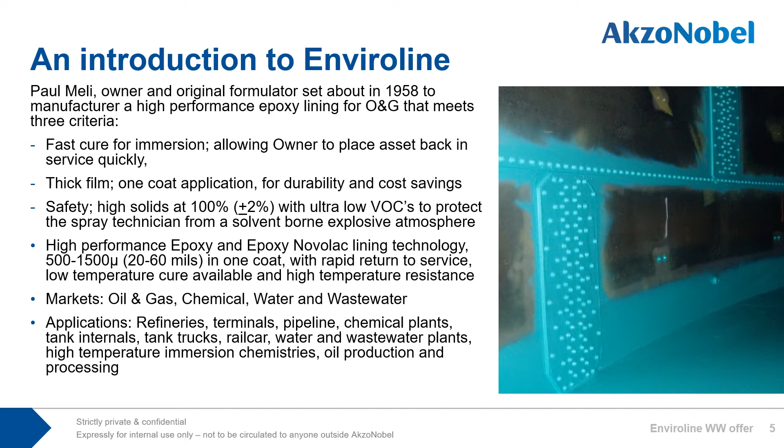Advantages of fast return to service. Taking a high elevation look and assuming the same tank size for all 3 scenarios, this construction time chart shows the typical difference of a 2-coat 5-day cure, a 1-coat 5-day cure, and representative of Enviroline products, a 1-coat 1-day cure, saving time, money, and delivering the asset back to the owner as quickly as possible.

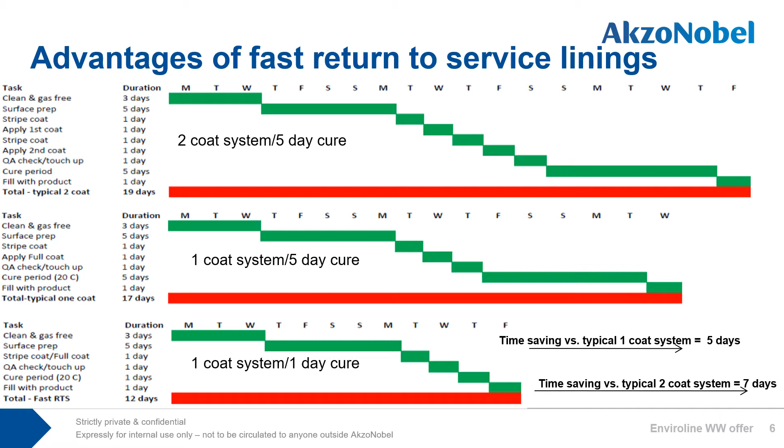We will begin with Enviroline 124, with origins going back 60 years as a quick-set epoxy to adhere to the steel cover and closing up of an existing underground oil storage tank after lining the interior and making it ready for a quick burial. It is a solvent-free 2-component polycyclamine cured Novolac epoxy and is highly viscous, can be applied at 1,000 to 3,000 microns in a single coat.

Benefits are good adhesion to a less than perfect surface prep, meaning a high-tech product, low-tech application. Single coat application by trowel or knife, and for the most experienced, airless spray is available. Fast return to service in 2 hours at 25 C. Excellent impact and abrasion resistance. Resistant to most fuel and oil commodities such as gasoline blends, biodiesel, crude, and ethanol.

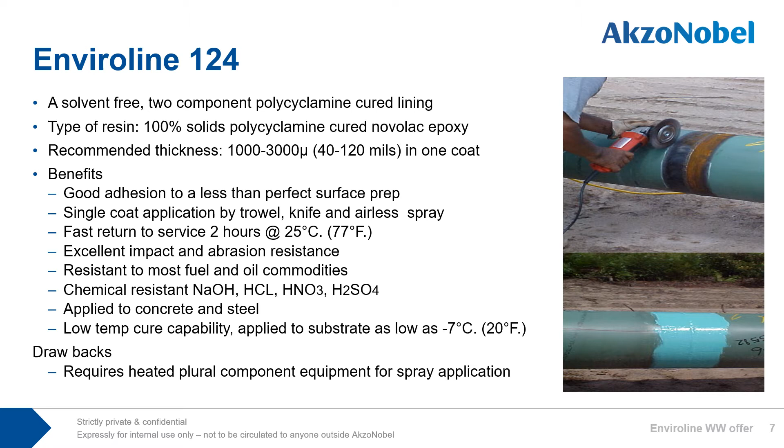Chemical resistant to sodium hydroxide, hydrochloric, nitric, and sulfuric acids. Can be applied to concrete as well as steel. With low temp cure capability, can be applied to substrate as low as -7 C. Drawbacks are if you intend for spray application, it will require heated plural component equipment.

The incomparable Enviroline 376F series. Enviroline 376F is the cornerstone lining system of the oil and gas industry. The first project with Enviroline, or at the time manufactured by IECC Industrial Environmental Coatings Corporation, was completed in 1995 with 376F60 for sour water service in the largest refinery on the West Coast, and it is still going strong.

After 25 years, with 4 products to choose from: Enviroline 376F30, 376F30LT, 376F60, and 376F60LT, this helps the owner with options depending on the season, cold atmospheric conditions, and corrosion impact to the asset. They are a solvent-free 2-component 100% solids polycyclamine cured Novolac epoxy, applied in a single coat at 500 to 2,000 microns, depending on which product you are applying.

We recommend Enviroline 376F30 applied at 500 to 1,000 microns and 376F60 applied at 750 to 2000 microns. Enviroline 376F60 can be applied as low as 20 mils. However, we'll need a warm substrate and a hot mix to help with flow and minimizing discontinuities in the film.

Applications depend on the severity of corrosion of the surface. Enviroline 376F30 manages new to moderately pitted substrate, and for heavy corrosion, Enviroline 376F60 works extremely well.

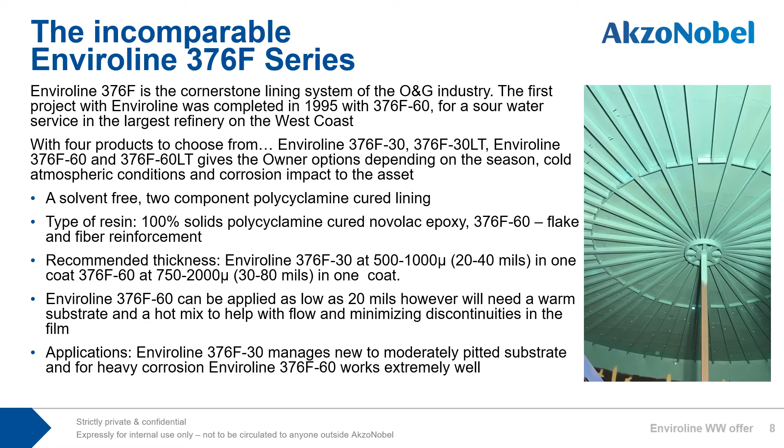Now on to the benefits of Enviroline 376F. Enviroline 376F60 and Enviroline 376F60LT are recognized per API Recommended Practices 652 as a reinforced thick film epoxy, and accepted by API Standard 653 as one of the safeguards for long-term inspection interval. See the API 652-653 e-learning module for more information.

Excellent resistance to crude oil up to 82 degrees C, fresh and saltwater immersion up to 60 degrees C. Manages immersion in sour crudes, all types of finished fuels, biodiesel, solvents, and strong caustics.

The low temp hardener for both 376F30 and 376F60 resins are one and the same. The regular hardeners are not interchangeable. Can be applied to a substrate as low as -7C.

Takes about 6 days to cure. I witnessed this on the North Slope, Alaska, in the winter several years ago, where outside temperatures were a calm -45 to -50 C.

Fast return to service in 14 hours at 25 C. I am not aware of another product with a faster cure for hydrocarbon immersion service in this industry, or one that can cure as low as -7 C.

Excellent impact and abrasion resistance. The drawbacks are poor resistance to acids; plural component equipment is recommended, however it can be applied with single leg airless equipment and an experienced crew. Enviroline 376F60LT should not be applied over 45 mils in one coat on vertical surfaces, or it may sag.

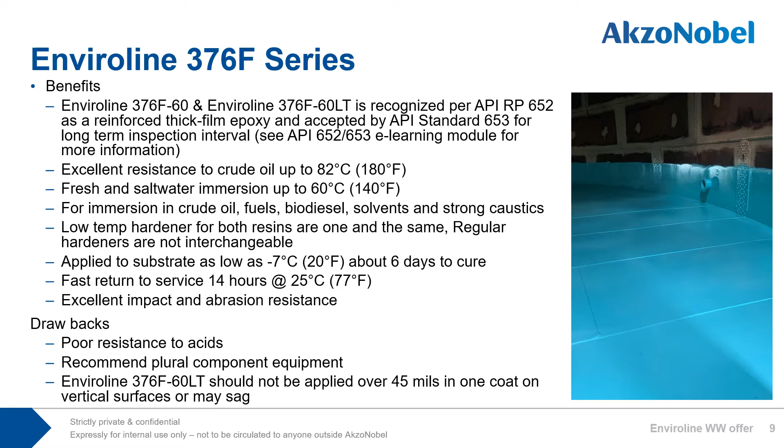Enviroline 405 HTR, one of the toughest, most versatile lining products I've had the pleasure of working with. An ultra-high solids, two-component, 100% solids polycyclamine cured Novolac epoxy with glass flake and fiber reinforcement, can be applied in one coat at 500 to 1500 microns.

Like 376F60, it's a reinforced thick film epoxy as defined per API 652 and accepted by API 653 as equal to fiberglass reinforced products. Suitable for immersion in crude oils, fuels, biofuels, solvents, strong caustics, and some alcohols like propylene and ethylene glycol.

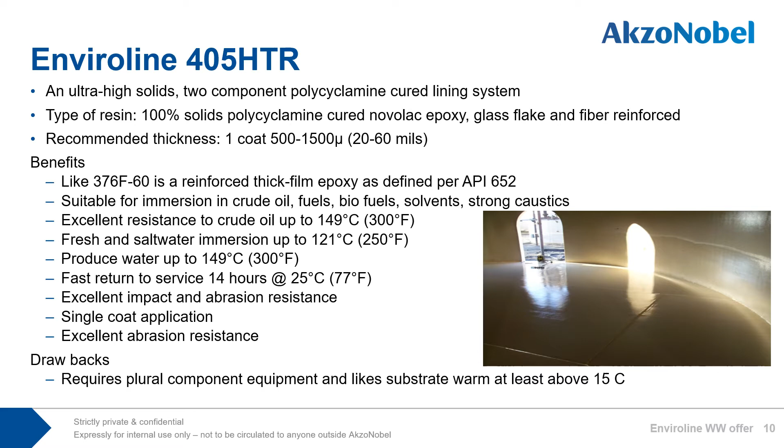Excellent resistance to crude oil up to 149 C, fresh and saltwater immersion up to 121 C, produced water up to 149 C, fast return to service in 14 hours at 25 C, excellent impact and abrasion resistance, single coat application. Drawbacks are it requires plural component equipment and likes the substrate warm, at least above 15 C.

Enviroline 2405 is almost as versatile as Enviroline 405 HTR, an ultra-high solids two-component, 100% solids polycyclamine cured epoxy with Teflon additive, applied in a single coat at 400 to 750 microns.

Excellent resistance to crude oil up to 149 C, fresh and saltwater immersion to 121 C, produced water to 121 C. Can be utilized as a CUI, managing up to 204 C. Suitable for immersion in crude oil, fuels, biofuels, and strong caustics. Fast return to service in 48 hours at 25 C.

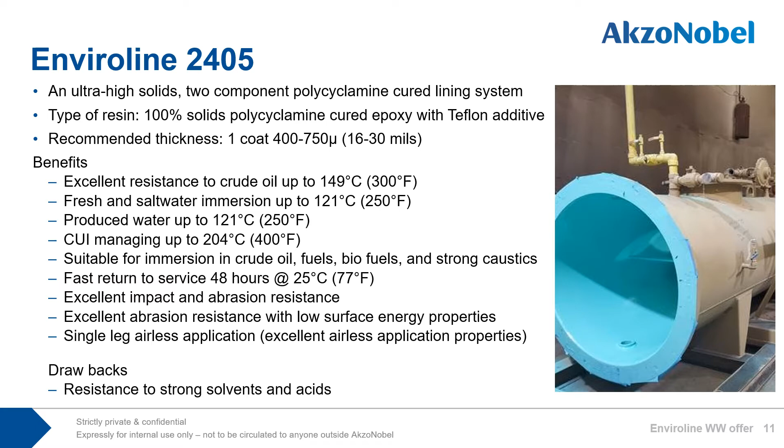Excellent impact and abrasion resistant, with low surface energy properties. Single leg airless application with excellent airless application properties. Drawbacks: resistance to strong solvents, acids, and alcohols like ethanol.

Typical end uses for the global range of Enviroline products. Applications for Enviroline 124 in maintenance and new construction.

As mentioned prior, the origins of this product go back 60 years, formulated then for sealing up a relined below-ground oil storage tank manhole cover, and now predominantly utilized for pipeline girth weld and holiday repair, with excellent adhesion to fusion bonded epoxy.

Coated pipe lab testing completed in the AkzoNobel Reutlingen lab confirmed excellent adhesion and compatibility with Resicoat epoxy powders, with a passing grade on high temperature cathodic disbondment testing.

Performing as high as 82C in buried environments, it can also be applied as a tank lining repair for Enviroline 376F and other linings, provided proper prep and chemical immersion compatibility. Please consult with technical support for immersion resistance.

Resistant to crude oil, aviation fuels, and gasoline blends including ethanol. Used in clarifiers and wastewater linings, and for performing localized repair, putting the asset back in service quickly.

Resistant to a wide range of chemicals, works well as a high-build thick film for pit filling on older tank floors, up to 3,000 microns, as well as crude storage rivet repair, stopping leaks on the external shell.

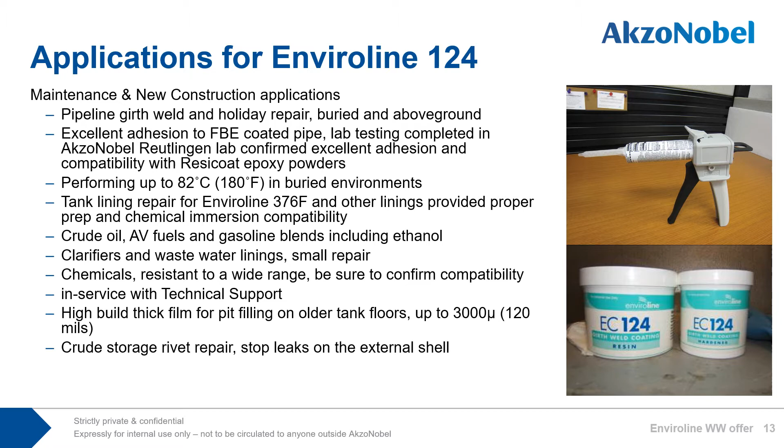At times this can be done with the product level up. May have to drop the product level below the repair location and take a couple applications to stop the weeping.

Applications for Enviroline 376F. This is one tough lining system for maintenance and new construction, with a decade of global history and decades in North America, used on pipeline interiors, exteriors, atmospheric and buried, passing robust cathodic disbondment tests at elevated temperatures.

Resistant to crude oil, aviation fuels, diesel fuel, biodiesel, gasoline blends, and ethanol. Compliant with Energy Institute Standard 1541, second edition 2016, which provides performance requirements for protective coating systems that may be used.

In aviation fuel handling systems, the standard recognized worldwide is an important third-party testing protocol for linings and coatings performance in aviation fuels immersion service. This shows the customer that Enviroline 376F60 passed the performance standard for corrosion and chemical resistant safe storage of aviation fuels. EI 1541 should be on every aviation fuel storage owner's specification.

Resistant to caustics, managing greater than 20% sodium hydroxide at 71C, less than 20% at 40C. Clarifiers and wastewater treatment plants, spools, chemical processing, secondary containment.

And I cannot emphasize enough how important Enviroline 376F60 has been recognized by API 652-653 as a reinforced thick film epoxy, equal in performance to an FRP system, applied in less time at less cost to the owner.

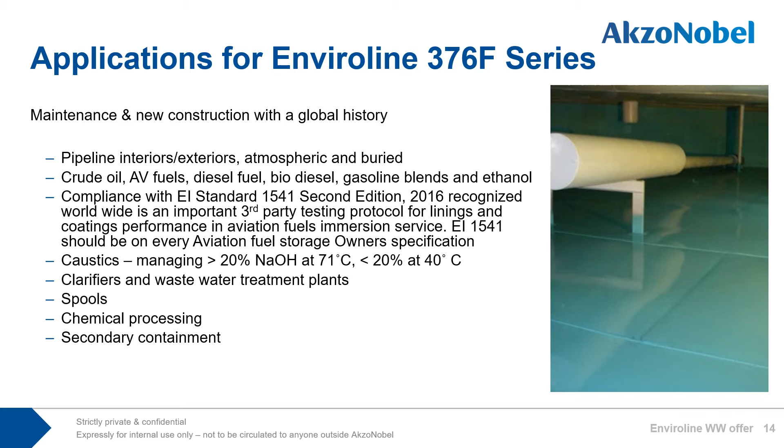Applications for Enviroline 405 HTR. For maintenance and new construction, with thousands of lined, fixed and mobile assets and miles of buried pipeline, interiors and exteriors, managing elevated temperatures and excellent resistance to cathodic disbondment.

As a versatile lining, resistant to crudes, diesel, biodiesel, gasoline blends, and ethanol, you will not find a better lining system for the demanding immersion environments found in upstream oil and gas production. Produce water, downhole tubular, heater treaters, separators, polishers, clarifiers.

A strong lining for various caustic services. Spools, resistant to elevated temperature chemical immersion services. Meets requirements of the latest API 652-653 publications as a reinforced thick film lining, formulated with a fiber reinforced system, allowing the maximum internal inspection intervals. Also great for secondary containment due to a wide range of elevated temperature and chemical resistance.

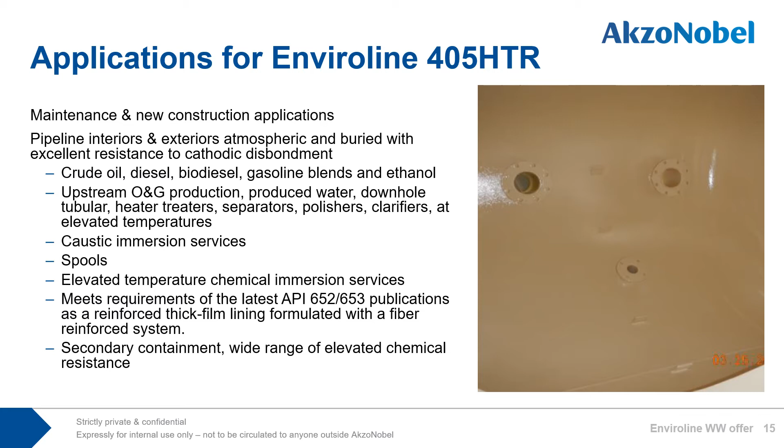Applications for Enviroline 2405. Great for maintenance and new construction applications with more than 1,000 vessels lined in a short time since final product release in 2015. Finding a home with OEM and rail cars due to versatility, ease of application, and fast throughput. And for rail cars, 2405 is FDA compliant for both wet and dry foods.

Miles of pipeline, both interior, exteriors, atmospheric, and buried. Resistant to crude oil, diesel fuel, and finished fuels. Excellent at elevated temperature chemical immersion service. Also great in oil field production. Produce water, downhole tubular, heater treaters, separators, polishers, clarifiers, and at elevated temperatures.

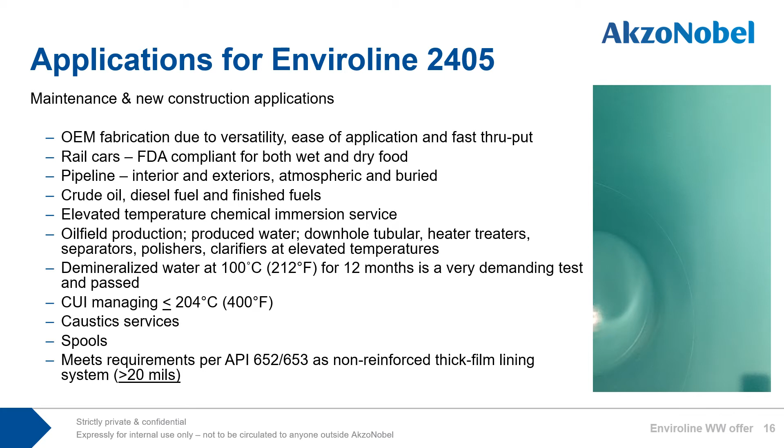Demineralized water. Very tough test at 100C for 12 months and passed. Manages under insulation at 204 degrees C. Resistant to caustics. Spools. Meets requirements of API 652-653 as a non-reinforced thick film lining system.

Here's just a few selected case histories of the owners and applications with the products listed in this module. Rather than call out the list, I'll leave you with 30 seconds to review.

Well, it's only 15 seconds. I think silence is long enough. But for more history, you can look up track records on the M&PC product data site.

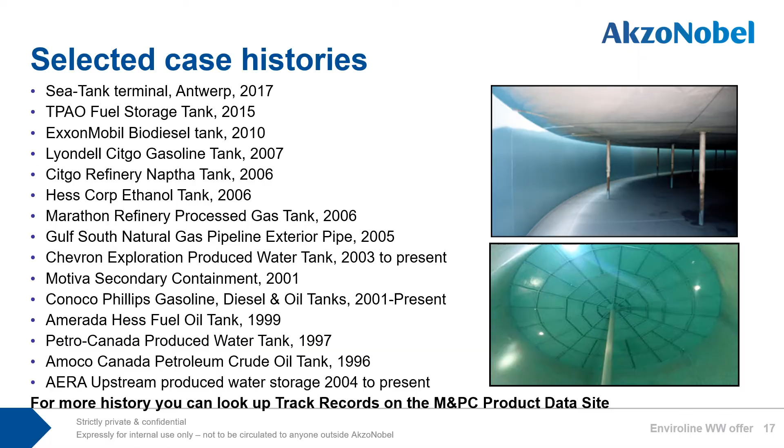And now moving on to surface preparation. Proper surface preparation is the backbone to maximizing the service life of a high-performance immersion lining system.

Recommended site requirements. Cleanliness requires organization in keeping the job site clean and safe. Contamination, as we discussed earlier, will cause a shorter life cycle and/or premature failure in the lining system. Moisture ingress causes degradation of prepared steel and will need to be reabraded to specification if compromised.

It is important that the job site is set up correctly, that you have adequate supply of electricity, and that your equipment is in good working condition. Important power sources include compressors for blasting and spraying, required to deliver enough oil and moisture-free clean air as necessary.

Ventilation is important to maintain a safe working atmosphere. Lighting to ensure good visibility in all phases of a lining project. Dehumidification to maintain environmental conditions, and it's important that the equipment is sized to the space, recommending holding the humidity below 45%.

Heating to maintain steel temperatures in accordance with the data sheets and application guideline during application and curing of the lining. Storage facility is helpful to maintain the temperature, protecting the products from cold and thermal cycling, possibly for preheat of materials prior to use.

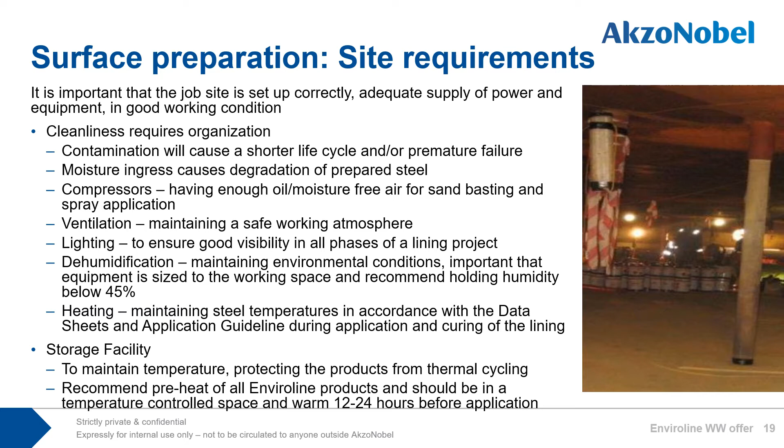All Enviroline products should be in a temperature-controlled space and warmed up 24 hours before application. The importance of surface preparation.

Successful in-service performance of Enviroline, as with any other coating systems, is ultimately dependent upon correct surface preparation. Important factors to consider are removing surface contaminants is the first step, and most important, because if contaminants are left on the substrate during the next step of abrading the surface, it will most likely drive the contaminants into the steel, setting the lining up for a premature failure.

Abrading the steel in accordance with the data sheet application guidelines and specification, if available, promotes adhesion of the lining. Completing these two steps correctly maximizes the service life of the lining system, minimizing the maintenance costs. And to wrap it up, poor surface preparation will cause a shorter life cycle and/or premature failure.

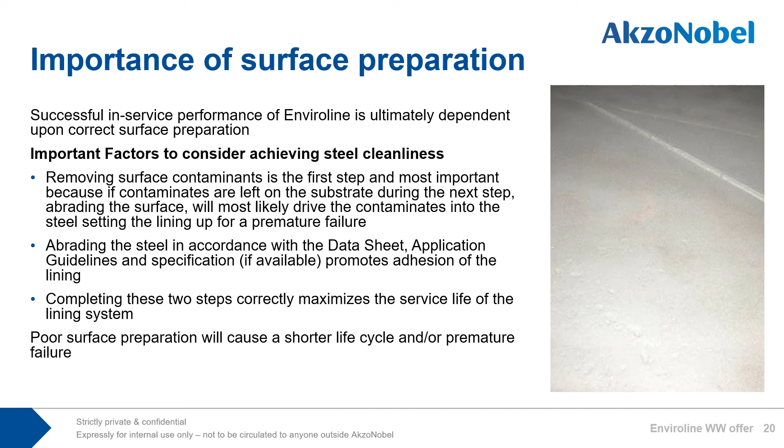Surface preparation considerations. Steel should have all weld spatter removed, and weld seams and edges should be rounded or smoothed. Otherwise, you need to be most diligent when stripe coating porous welds and anomalies left on the substrate. All surfaces must be clean, dry, and free from contamination such as dirt, dust, soluble salts, oil, and grease.

Check your product application guidelines for maximum permissible soluble salts, which is very important for elevated temperature aqueous solutions. Coatings and linings are permeable, and eventually water will get to the substrate, and if there's contaminant left, it will create a corrosion cell and blister the lining.

Allowable soluble salt levels may differ depending upon cargo and temperature. Acceptable soluble salt levels drop as temperature goes up, meaning the higher the service temperature, the cleaner the steel is required. Generally, the method of preparation is by dry abrasive blast, achieving an SA 2.5, an NACE number 2, or an SP10. These three standards achieve similar steel cleanliness.

Certain aggressive immersion conditions, such as elevated temperature aqueous solutions, may require a higher level of cleanliness, an SA3, an NACE 1, or an SP5, again achieving similar steel cleanliness. A sharp angular profile of 75 to 125 microns is required for thick film linings.

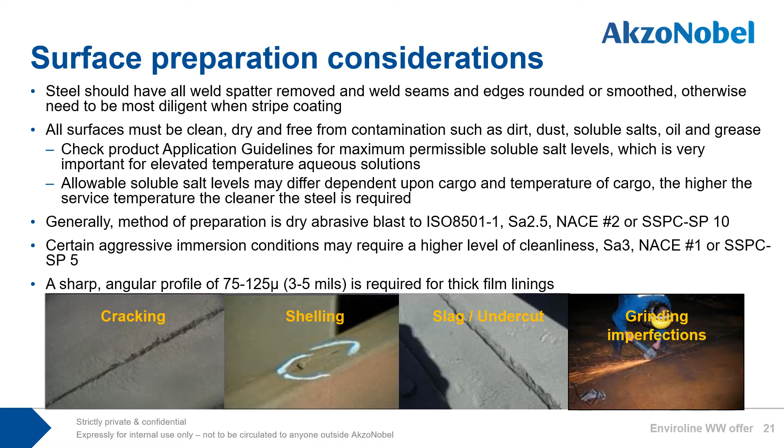My favorite topic, the application of Enviroline products.

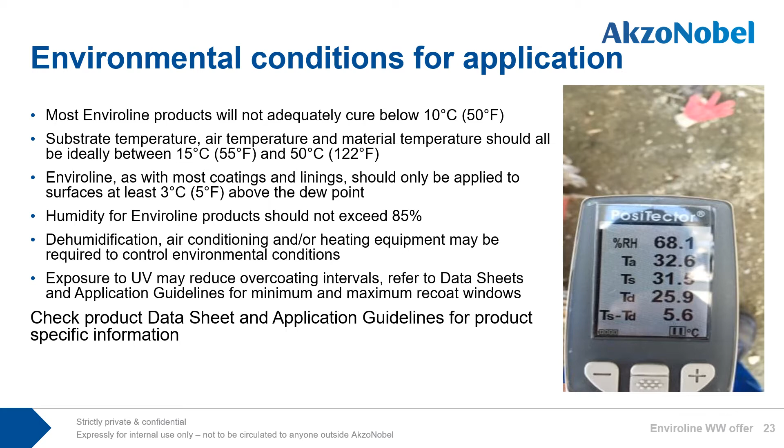Exposure to UV may reduce overcoating intervals, so be aware of the minimum and maximum recoat windows as recommended in the data sheets and application guidelines. Always check the product data sheet and application guidelines for specific information.

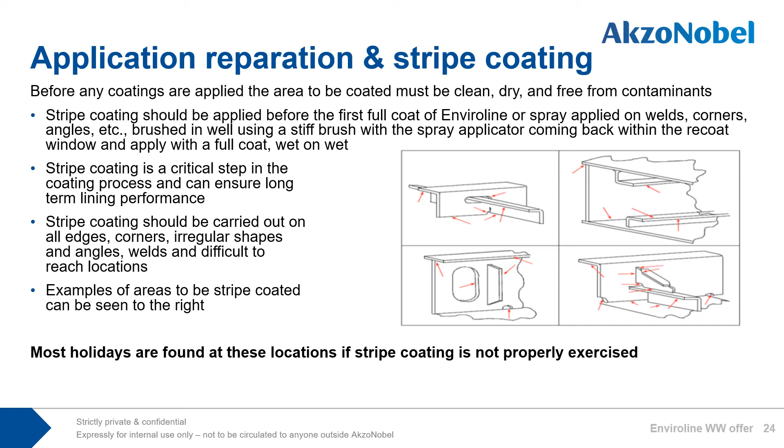Here's an example of proper stripe coating. For more viscous materials like Enviroline, you may require a stiffer brush, or like the brush in this picture, taking a pair of scissors and cutting back the bristles about halfway.

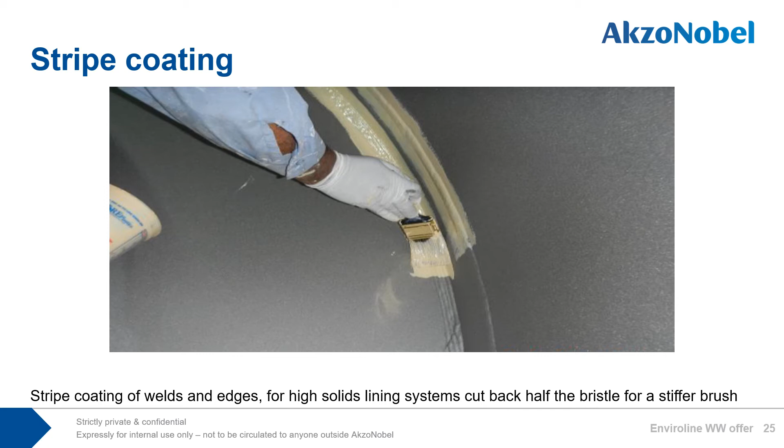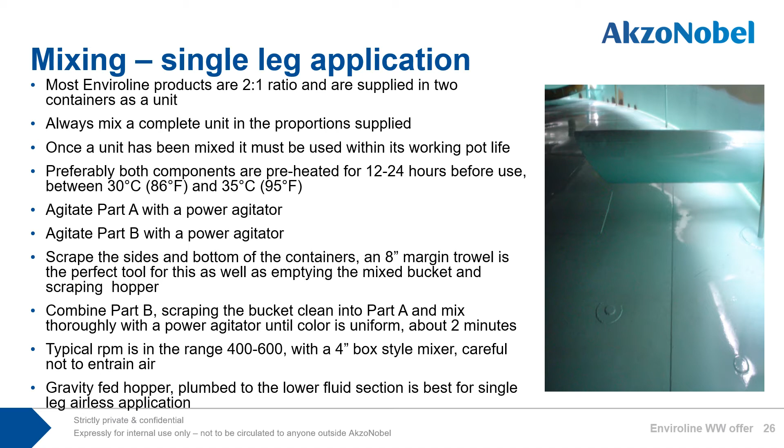Combine part B, scraping the bucket clean into part A, and mix thoroughly with a power agitator until color is uniform. It takes about 2 minutes. Typical RPM is in the range of 400 to 600 with a 4-inch box-style mixer, trying not to entrain air. A gravity-fed hopper, plumbed to the lower fluid section, is best for single-leg airless application.

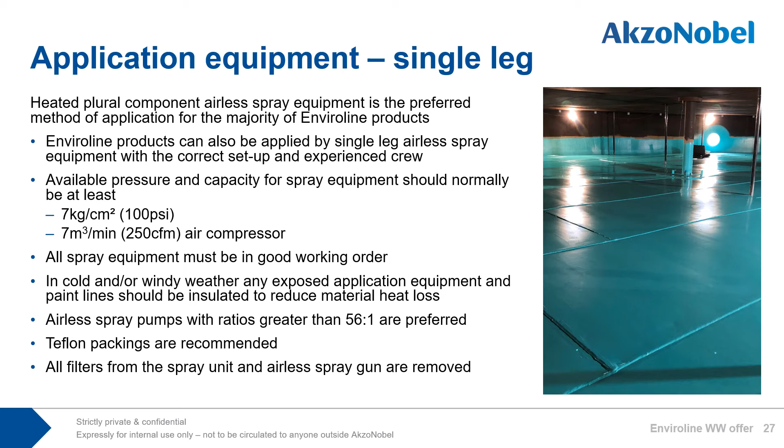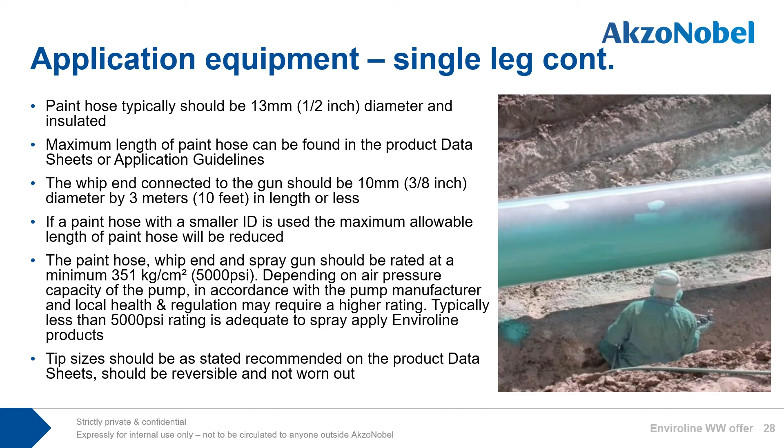And there's more on single leg airless application. We recommend that both components are preheated between 30 and 35 C for 24 hours. Trace heated hose or insulated hose with an inline heater is recommended to maintain the correct and uniform application temperature. I recommend keeping the length of the paint hose as short as possible and no more than 30 meters.

Always refer to the product data sheet and application guidelines for correct material temperatures during application. If material overheats during any part of the application process, it is recommended that the application is halted and the pump cleaned out immediately to avoid risk of material setting up in the hopper, pump, lines, and gun. Usually this is spotted by either the applicator losing the fan at the gun or the hopper tender seeing the product beginning to set up in the hopper.

Maximum application temperatures differ by product, but temperatures above 50 C should be generally avoided with a single leg application.

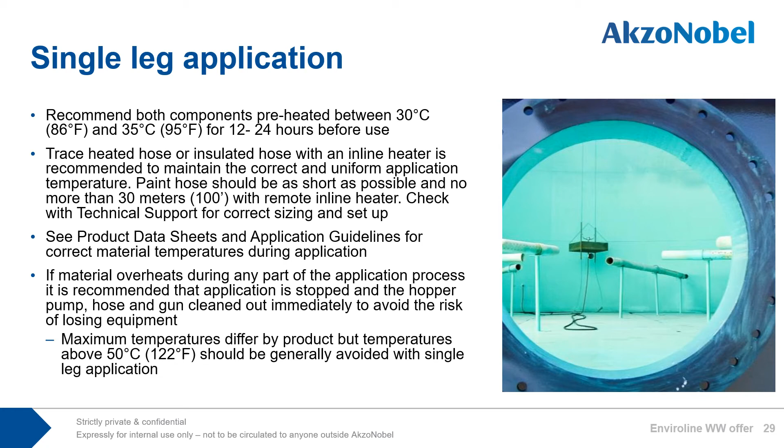Enviroline single leg airless setup. Enviroline 2405, 405 HTR, and 376F can be applied with a single leg airless with the equipment shown on this slide. For single leg airless setup, it starts with a minimum of a 56-to-1 pump. We did use 45-to-1s decades ago, spraying the predecessor of these products, so it can be done, just hard on the equipment. Minimum of a 90 cubic centimeter fluid section, which is important.

Larger fluid section delivers volume, which along with heat is key to successful application. Moving on to the inline heater. The mixed paint coming out should be at 35 to 46 C, and around 35 C at the spray gun for the best spray pattern.

When you first start up, you should recirculate until the paint lines and gun heat up. Or I recommend keeping the hose and gun warm prior to application and begin to spray into a bucket until spray pattern is achieved. You'll lose a little mix this way, however less risk than possibly recirculating too long with a short pot life.

The paint hose should be a maximum 15 meters of 13 millimeter diameter insulated hose, 30 meters if the hose is heated, and a 10 millimeter diameter 2 to 3 meter whip hose.

For the spray gun, I recommend one that has the paint delivered direct to the barrel behind the spray tip with a live swivel connection to the whip line, achieving better throughput this way. WIWA 500F and the new Graco silver guns have no springs to deal with. Graco XTR5 and XTR7 deliver through the handle, again no springs. They do have plastic grips for the hot handles.

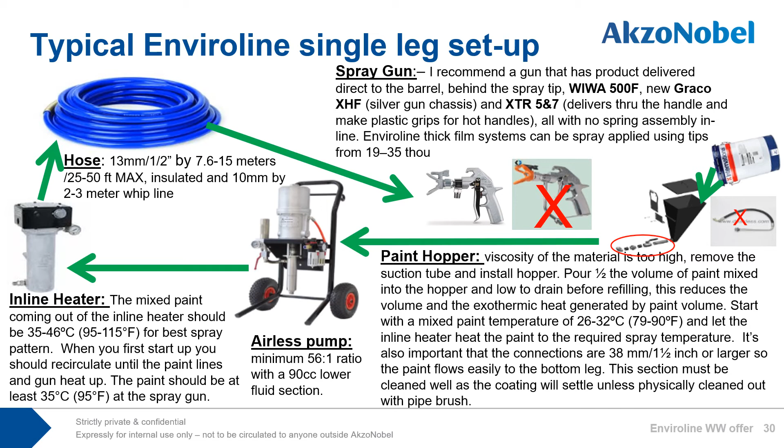I know the last slide had a lot of information regarding single leg application, for the few and brave who don't have a plural setup or whose project isn't large enough to bring out the big guns. However, it's a good exercise in understanding the basics of industrial lining's airless application.

Moving into plural component application, most Enviroline products are 2-to-1 ratio and supplied in 2 containers sold as a unit. Preheat both components overnight to around 30 to 35 C. For application of Enviroline 376F and 405 HTR, Part A can be heated to a maximum of 60 C and Part B a maximum of 43 C.

Important to note, when recirculating during startup, bring Part A and B slowly to temperature. Depending on the length of the hose bundle, it may take several hours. With heated hoses, Part A temperature between 50 and 55 C and Part B between 40 to 43 C should be sufficient to spray out.

Heated hoses should be around 50 to 60 C to maintain 43 to 46 C at the gun for the best spray pattern. Agitate at low RPM, Part A and Part B in their own containers, scraping the sides and bottom of the container to ensure a complete mix.

Load into appropriate containers or hoppers on the spray unit. Provisions of a warm shelter, heated hoses, and hoppers will help maintain temperature during the application.

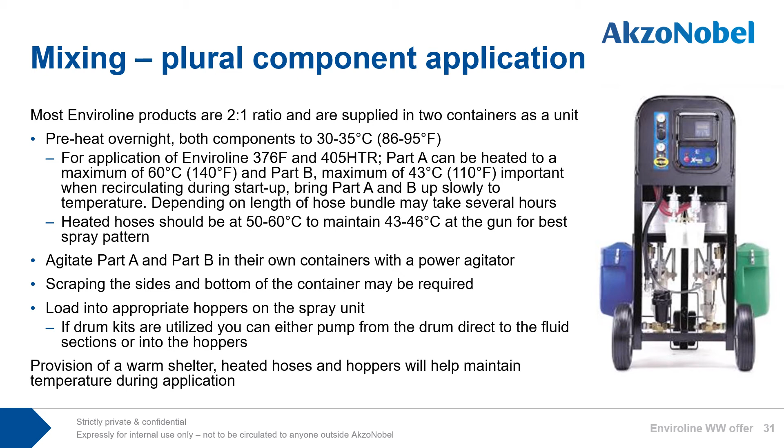More on plural component equipment setup. Application by heated plural component equipment is the most efficient and preferred method when working with Enviroline products, particularly when coating large areas. A pump capable of accurately delivering the correct mix ratio is essential. WIWA Dual Mix, Graco XP XM, or fixed ratio Hydra-Cat pumps are recommended.

Is one better than the other? I prefer the durability of WIWA. However, Graco has recently beefed up their equipment, and I recommend a 56:1 or larger airless.

Lower fluid sections should be no less than 90 cc's. For instance, at a 2:1 ratio, Part A lower would be 180 cubic centimeters and Part B lower at 90 cubic centimeters, delivering the volume for successful application.

We recommend all filters removed from the spray unit and spray guns. Screens tend to clog with fillers and thick film, compromising volume throughput. Volume and heat are very important.

Two half-inch by 12 element inline static mixers are recommended, located in line after the mixer manifold. I prefer to see one static mixer at the mix manifold and one between the paint hose and the whip line. The paint hose should be at least 15 meters long to help integrate Part A and B.

Heated tanks and heated lines are normally required. Recommended temperature requirements can be found in the data sheet and application guidelines.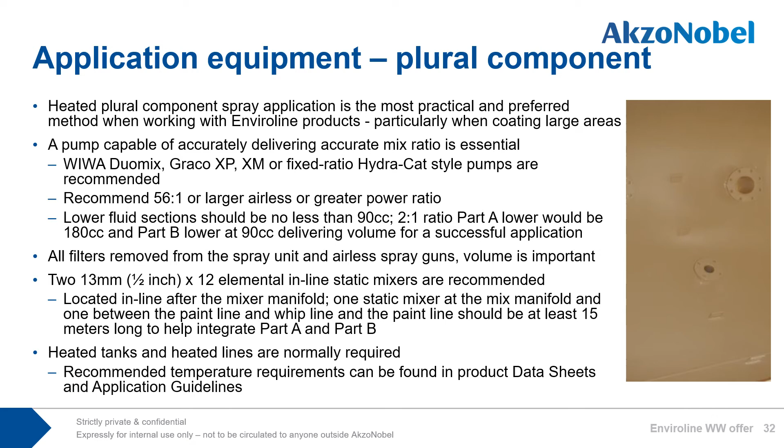On this slide, we will discuss paint hose setup for plural component airless application. For a 2:1 setup, I recommend Part A hose should be 13 millimeters in diameter, and Part B hose should be 10 millimeters in diameter. What the two diameters accomplish is delivering as closely as possible a 2:1 volume ratio to the mix manifold.

The paint line off the mix manifold should be 13 millimeters in diameter and a maximum of 45 meters in length. It's best to have a shorter paint line at 15 meters and a longer Part A and Part B heated hose bundle from the pump to the remote mixing block.

The remote mixing block can easily be carried about inside the tank.

The gun whip should be 10 millimeters in diameter and 3 meters or less in length, and all hoses, lines, and spray guns should be rated in accordance with the plural equipment pressure rating. Most Enviroline products require a minimum of 5,000 psi fluid pressure rated equipment for spray application. Be sure to check local legislation on pump to hose ratings.

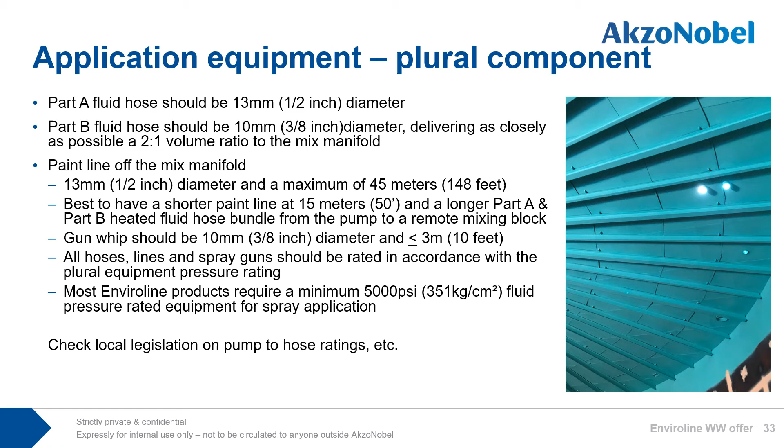Importance of technical inspection and quality control. Technical inspection: project control via regular inspection and inspection hold points is vital to a successful coating project.

Items of particular attention during substrate preparation and application are as follows. Steel cleanliness per the data sheets, application guidelines, and specifications if available. Correct equipment and setup: well-maintained and correctly sized equipment, remembering that volume and heat are your friend. Keeping an eye on environmental conditions while holding the abraded steel and during application and cure ensures a long service life. Measurement is important during application to monitor wet film thickness.

Enviroline thick film systems hang so well that, if not paying attention, you tend to apply more than the required amount, running low on product before completion of the job.

Post-cure inspection: a lot can be learned from a visual inspection, which tells you how well the application went. Are there sags, runs, spray application from too far back, cold substrate that didn't flow well, and dry fall?

Measurement of DFT does two things: records the dry film thickness, and confirms the owner received the asset within specifications or guidelines. Holiday testing is very important, particularly with aqueous solutions and any immersion environment that has water separation.

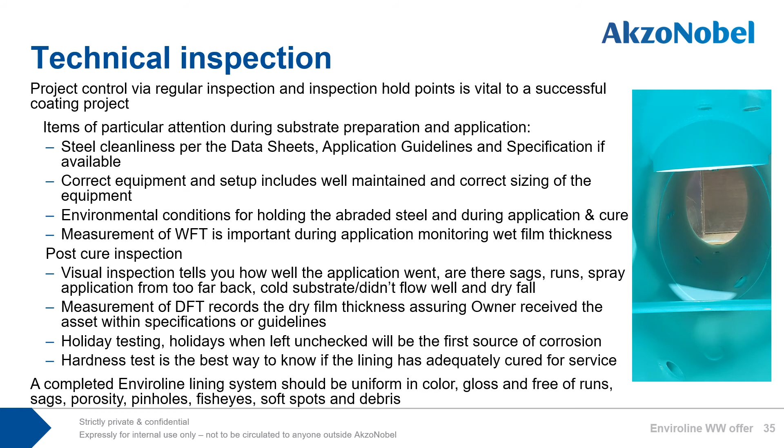Holiday testing and visual inspection. We recommend performing holiday testing on coatings and linings, particularly those in immersion. Spark or holiday testing should only be done once, or you risk damaging the lining. It will detect cracks, pinholes, fish eyes, low dry film thicknesses, and cratering within a coating. We follow NACE SP-0188: for films greater than or equal to 20 mils, we recommend 100 volts per 25 microns.

Visual inspection: as discussed, you may find fish eyes or cissing caused by contamination of the substrate from grease, solvents, wax, or silicone.

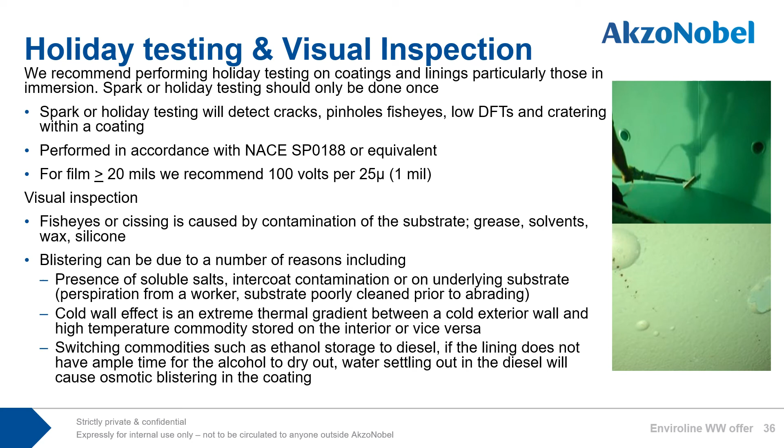Blistering can be due to a number of reasons, including the presence of soluble salts, intercoat contamination, or issues on the underlying substrate, such as perspiration from a worker, or the substrate being poorly cleaned prior to abrading. Cold wall effects occur where there is an extreme thermal gradient between a cold exterior wall and elevated temperature commodities stored on the interior, or vice versa. Or switching commodities, such as ethanol storage to diesel: if the lining does not have ample time for the alcohol to dry out, water settling out in the diesel will cause osmotic blistering in the coating.

More on visual inspection: cracking, flaking, and delamination can be caused by a number of reasons, including contamination from the usual suspects such as grease, oil, debris, and soluble salts; insufficient surface preparation from not cleaning the substrate well enough, whether before or after abrading; incorrect surface preparation and not achieving a sharp angular profile as required; missing the overcoat window or an amine blush, compromising adhesion; and incorrect coating system, not managing the immersion service. Stress on the coating can happen where there is a large difference in film thickness, for instance overbuilding in a corner where thin meets thick.

To repair the defective area, it must be cleaned of contaminants and the coating removed. Correct surface preparation must be undertaken, surfaces must be clean and free from contamination, and the correct coating system for the end use must be selected and applied.

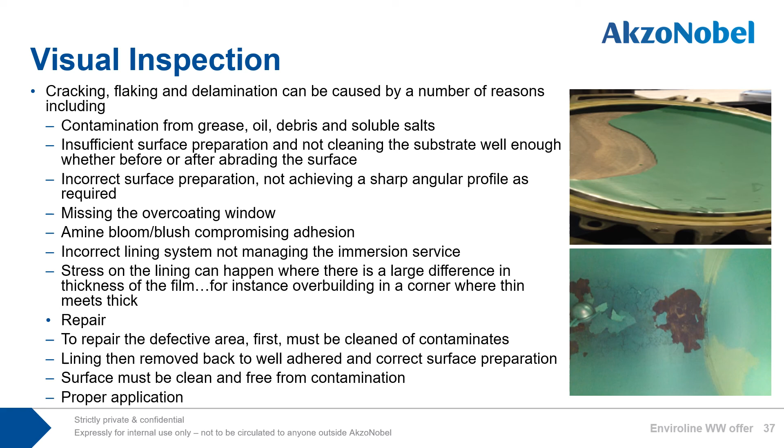Continuing with visual inspection. Amine bloom and blush are two slightly different chemical reactions at the surface of the lining during application and cure, having the same detrimental effect. Amine bloom are amines that have migrated to the surface due to exposure to high humidity, dissolve in the moisture, and leave a shiny or oily looking deposit behind. However, these amines at the surface may further react to moisture and carbon dioxide and become a blush. Either can adversely impact the adhesion of subsequent coats.

Amine blush is caused when the amine curing agent at the surface of the coating reacts with carbon dioxide and moisture to form a carbamate, and can produce a blush or white spotting during the curing process. Sources of heat to warm the tank can be electricity, steam coil, or indirect fired heaters, whereby the exhaust containing contamination and carbon dioxide exits to the atmosphere to help prevent bloom or blush.

Bloom is seen when temperatures drop below the dew point, or during colder temperatures and high humidity, exhibiting a whitish patching or amber yellow, greasy or waxy appearance, and can be tacky to touch. Overcoat and intercoat adhesion are the primary concerns. However, with many single coat linings, this is not a concern. Generally, a hot water and soap wash should be sufficient to clean the surface.

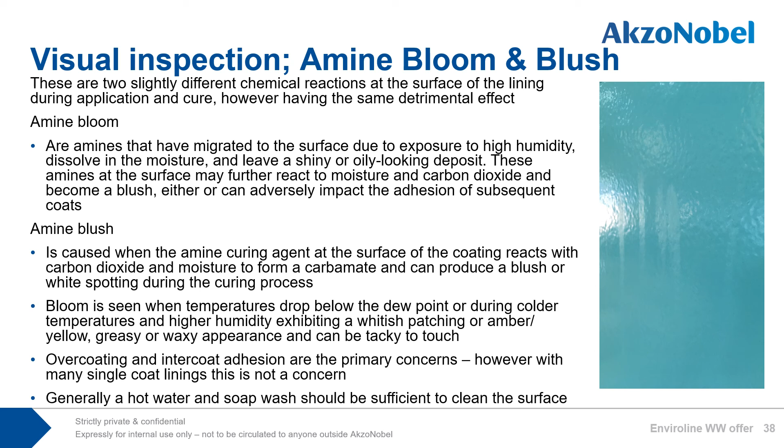And now for repair procedures. Repair procedures are dependent upon the individual circumstances, but can typically be split into two broad categories. Major repairs: a major repair should be dealt with as if the project was beginning, in other words treated as new surfaces and completed per the specification, and all previous recommendations should be followed. Minor repairs: this includes areas damaged either at the initial coating stage or during the operating service, and could include the problems we just looked at in previous slides. This repair section will focus on minor repairs.

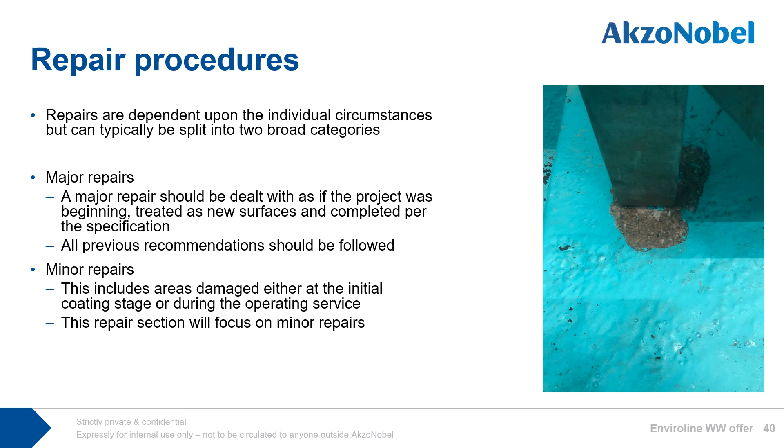Minor repairs: the area to be repaired must be cleaned per SSPC-SP1. Any damaged coatings or corrosion should be removed by either vacuum blasting or utilizing hand tools per SP3 to expose the existing profile. Any pitting which does not need rewelding should be prepared by needle gun or cone grinder. Feather edges and abrade the area immediately surrounding the repair to remove the gloss and provide a key. Tape the perimeter of the repair and remove after application, but before full cure. Vacuum dust free prior to system application.

Apply the lining system as detailed in the specification. If brush application is used, multiple coats may be needed to achieve specified thickness. Thick film, one coat systems may be easiest to repair with a trowel or putty knife.

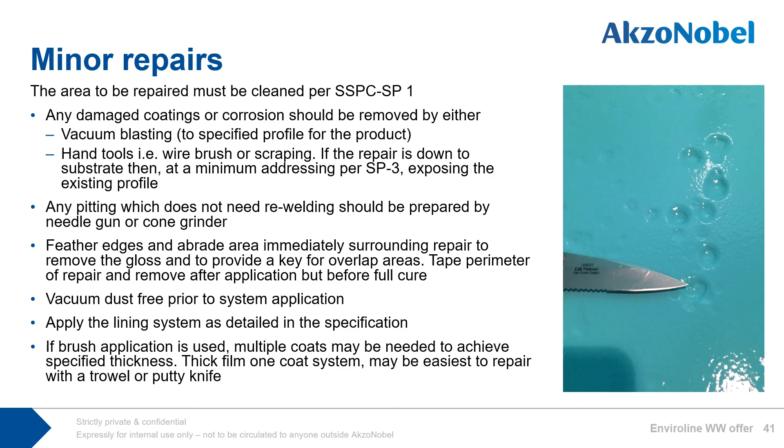And to summarize all that you've listened to and read in the past 40 minutes, and to wrap it up: for surface preparation, cleanliness is key, and surface profile does differ from product to product. For application, all equipment should be in good shape and suited to fit the scope of the project. Stripe coating is a significant step to ensure a holiday-free film. Preheating and maintaining temperature of material delivers a successful application.

Single leg equipment can be used, but plural component has the most flexibility and should be preferred. Whichever you choose, correct airless equipment setup is paramount to a successful application.

Technical inspection and quality control: environmental conditions should be strictly adhered to as per the data sheet and application guidelines. Wet film and dry film, visual inspection and holiday testing are necessary to ensure a long service life. Typical problems are caused by poor surface preparation or poor levels of cleanliness.

Under repairs, we had minor repairs. What we discussed today requires a very high level of cleanliness, and it's imperative that you follow the project specification, product data sheets, and application guidelines for the individual products.

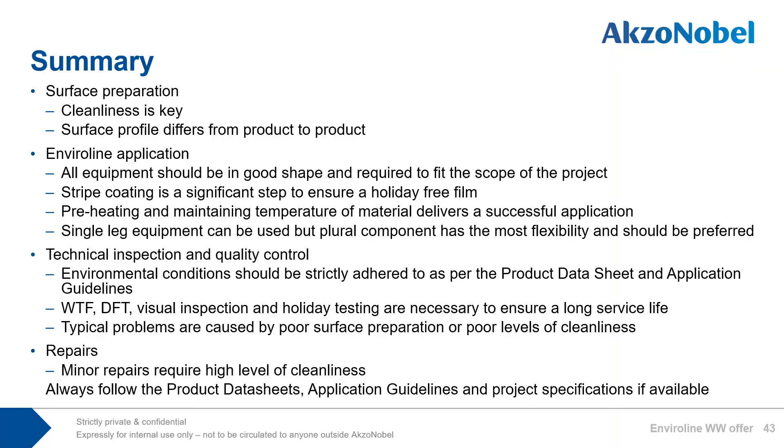I'll leave you with a true short story. In the early 90s, as a contractor with crews sandblasting and lining tanks, we were utilizing Industrial Environmental Coatings Corporation's single coat, fast cure, thick film epoxy. Sound familiar? I was on the phone with their marketing director and had a competitor's data sheet out on the desk that I was looking to switch out for an IECC product. She was lamenting that the name of the company was such a mouthful and needing to come up with a brand name for their product line. Logging into my computer with my password and looking at another manufacturer's data sheet on my desk, I put the two together and came up with Enviroline. She said that might work. The rest is history, folks. I didn't even get a penny for my thoughts.